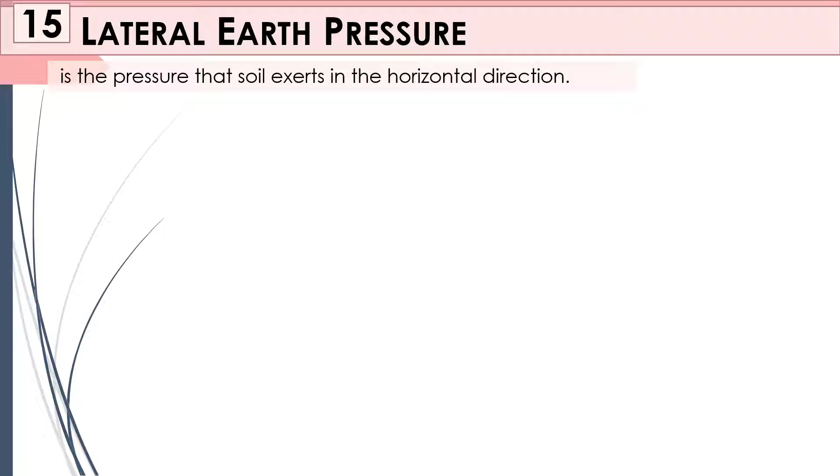So today's topic is all about lateral earth pressure. Let us define what a lateral earth pressure is. Lateral earth pressure is the pressure that the soil exerts in the horizontal direction. It is important because it affects the consolidation behavior and the strength of the soil, and because it is considered in the design of geotechnical engineering structures such as retaining walls, basements, tunnels, deep foundations, and braced excavations.

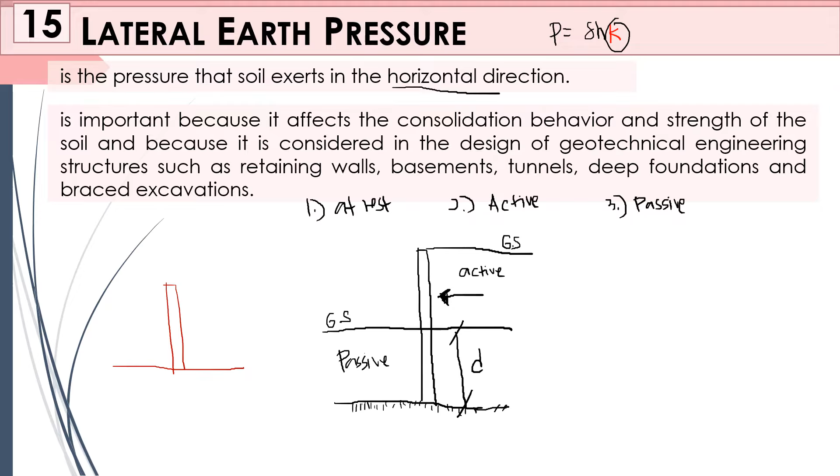It is when the lateral force of both sides are equal. So, sabihin natin, ito yung lateral force dito on the right side, ito naman yung lateral force natin on the left side. Meaning to say, the lateral forces are equal and it will lead to no wall movement. Kapag no wall movement, ibig sabihin, your lateral earth pressure is at rest.

Again, active lateral earth pressure tends the retaining wall to move away, or tinutulak mismo ng soil yung retaining wall natin, while your passive lateral earth pressure is yung retaining wall is papunta sa soil. Okay? Sana na-gets yung pinagkaiba ng tatlong categories natin.

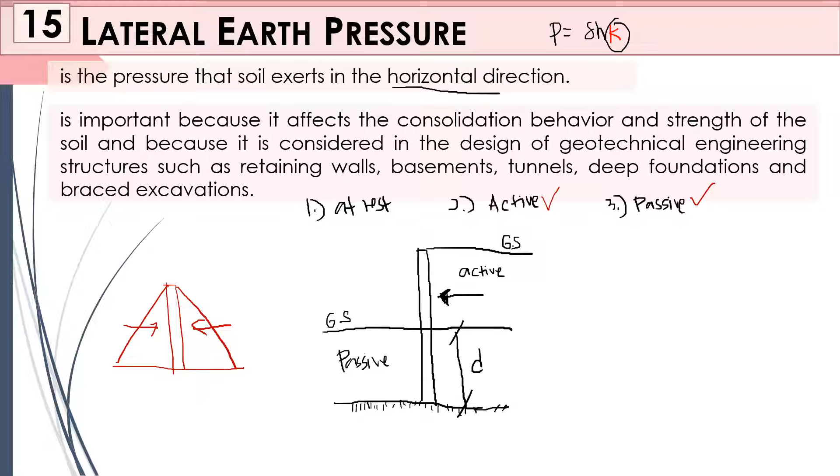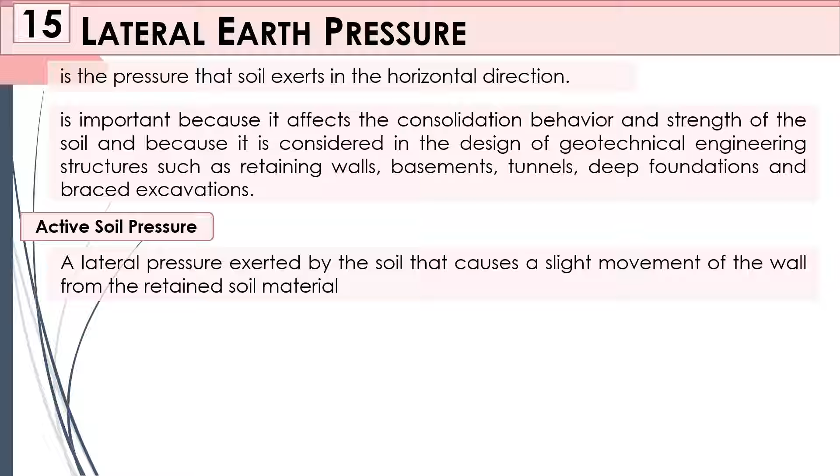Okay. So, active soil pressure, it is a lateral pressure exerted by the soil that causes a slight movement of the wall from the retained soil material. Pressure exerted by the soil against the wall is referred to as active pressure. So, yun yung sinasabi ko, pinupush away ng soil yung retaining wall natin.

While the passive soil pressure, it is a lateral pressure exerted by the soil by moving the wall slightly towards the retained soil material. Okay, ibig sabihin, it means that the retaining wall moves towards our soil. And passive soil pressure, that is the resistance offered by the soil to an object pushing against it.

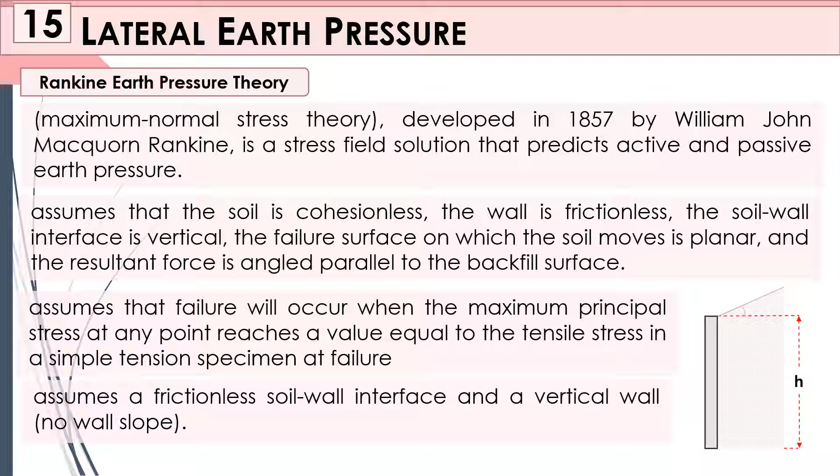Okay, so sa lateral earth pressure natin, we have 4 parameters to be considered. If meron tayong categories, meron din tayong parameters. So, the different parameters, let us introduce that to a pressure diagram from a 1 meter layer of the soil. So, for example, ito yung soil natin. So, the first parameter is yung soil natin.

And if we will try to draw a pressure diagram out of it, your soil will be a varying diagram. And the formula for your soil, same sa sinabi ko a while ago, that is your vertical pressure. So, para maging lateral siya, i-multiply lang natin siya ng coefficient ng ating lateral earth pressure. So, therefore, the formula is K gamma H.

So, ano pa yung other parameter natin? We have your cohesion. So, you have your active cohesion, which is PC, equivalent to 2C square root of K. And you have your passive cohesion. As you can see, the arrows magkakaiba yan. Pag sinabi nating active cohesion, take note that is a negative 2C square root of K. Pag passive cohesion naman, that would be positive 2C square root of K.

Ma'am, bakit po magkaiba? Bakit ang active is negative and ang passive natin is positive? So, balikan natin yung ating diagram kanina. If this is your depth, ito yung ground surface natin on the right side, ito yung ground surface natin on the left side. Sabi natin, active ito. Kapag active, ano ginagawa ng pressure natin? It tends to move away the retaining wall.

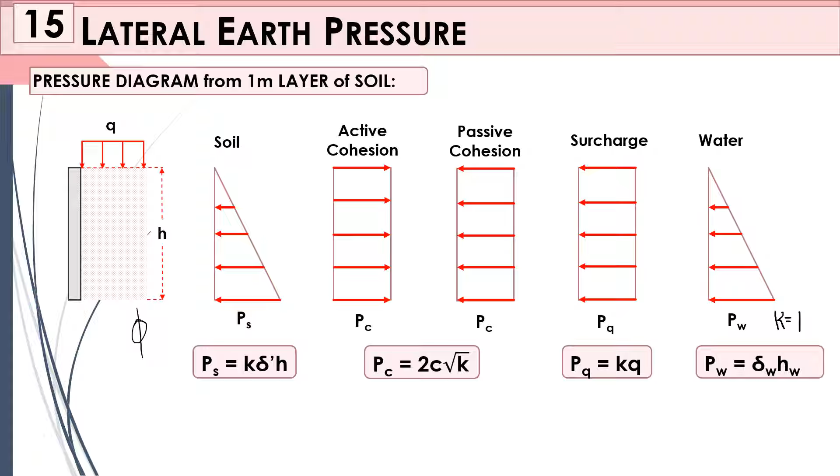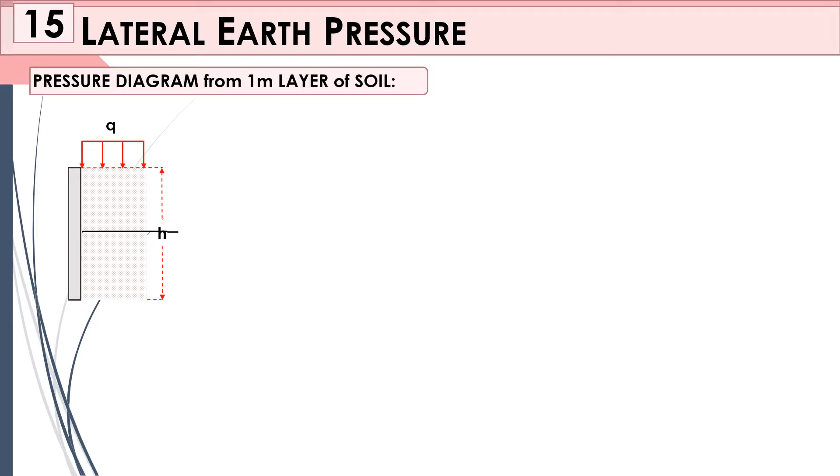Okay, so 4 parameters natin in lateral earth pressure: that is your soil, cohesion, surcharge, and water. Okay, so let us try to draw your pressure diagram based on the different parameters. So, sabihin natin, this is your soil. Let us consider that yung soil natin has 2 layers. Tapos sabihin natin, nandito yung water table natin.

So, first layer, this is your unit weight 1. This is your active coefficient 1. And this is your cohesion. On the layer 2 natin, this is gamma sat. Gamma sat na, kasi under na tayo ng water table. So, you have your active coefficient 2 and you have your cohesion 2.

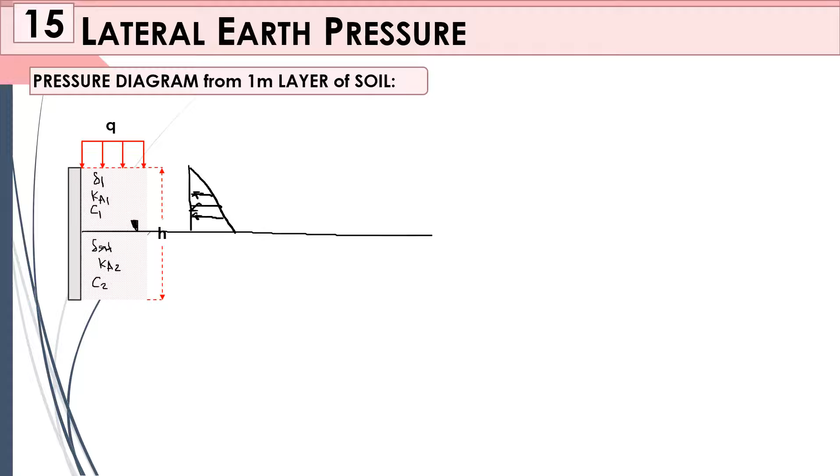So, unahin natin drawing yung soil natin. Sa first layer natin, di ba sabi natin that would be a varying distribution. Varying natin yung load natin. Since active siya, dapat ganito yung ating arrow. So, this is our pressure 1. Papunta sa layer 2 natin is magbabago.

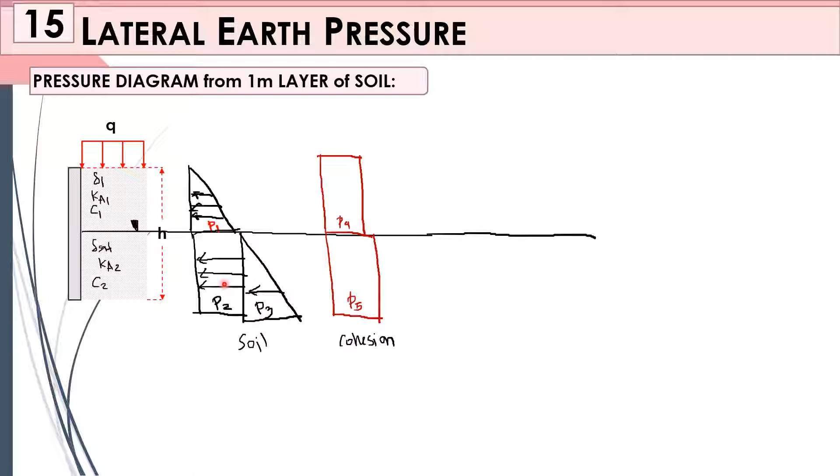Next is for the cohesion. So, since ang cohesion natin is rectangular pa rin, this is for the first layer. So, next is this one. Sabihin natin this is your pressure 4, this is your pressure 5. So, this is soil. This is for your cohesion. And so forth na for the surcharge and for the pore water pressure. Mas madali kasi kung iibahin na natin. Basta yun lang yung magiging idea, parehas dito sa sinabi ko sa ating soil, kaya meron kayong trapezoid na nakikita.

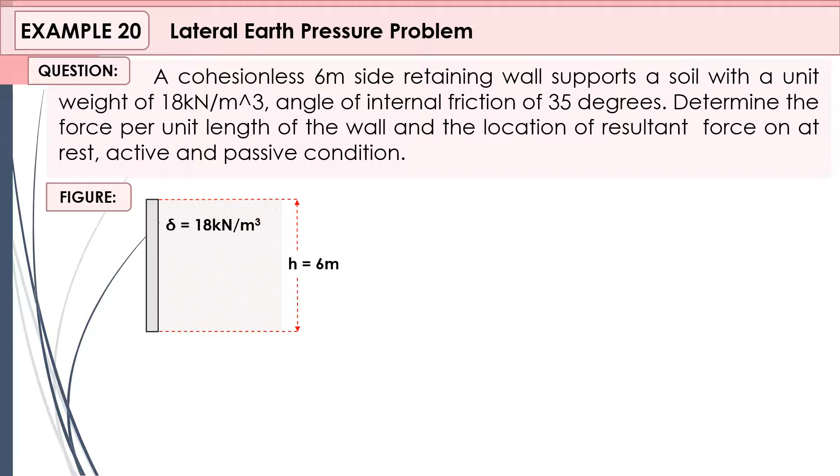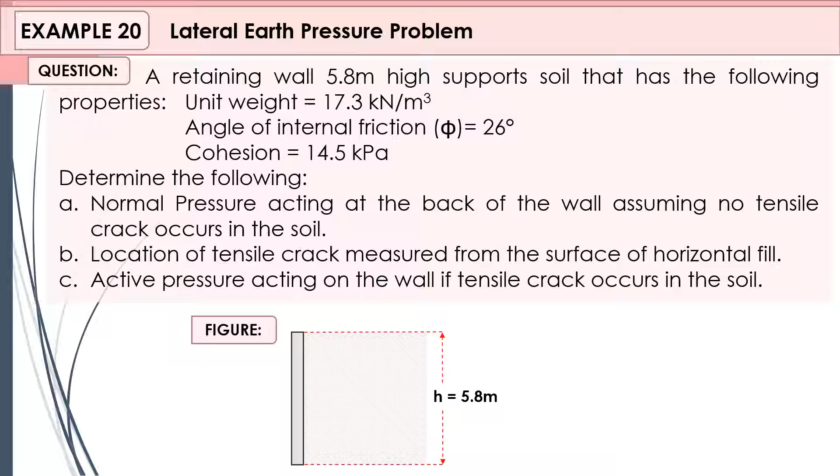So let us try to determine your normal pressure. So single layer pa rin yung example dito, no? So you have your cohesion, since sinabi naman. So let us try to get your soil pressure. So since active to, hindi nga pala sinabi kung active or passive.

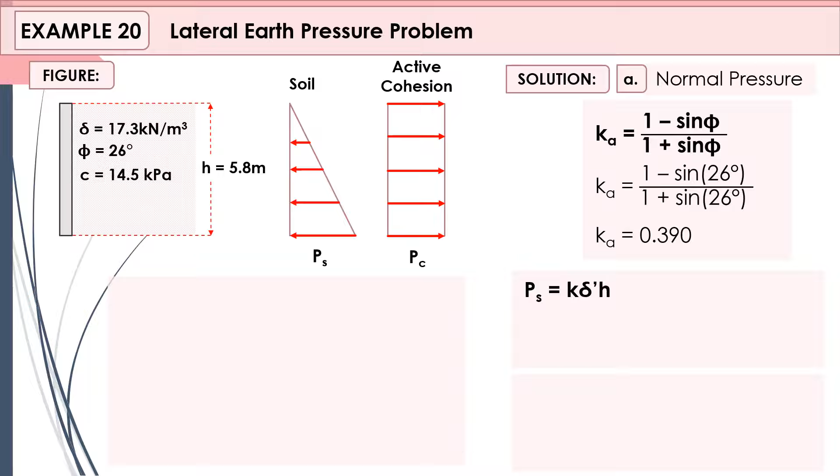So let us try to get your active cohesion. So that is 2C square root of K. Okay. So, kunin daw natin yung force natin dito sa wall. So, this is your Fs. This is your Fc. So, again, bakit negative yung Fc natin? Sabi ko sa inyo, kapag active yung soil natin, yung cohesion natin is negative.

So, to get the force na nagre-resist dito sa wall natin, get lang natin yung area ng ating pressure diagram. So, you have your 1/2 of PS times H times 1 meter, minus PC times H times 1, per meter length man tayo. So, that is 1/2 of 39.133 times 5.8 na height. So, that is for your soil pressure.

Minus your active cohesion or your cohesion pressure, that is 18.110, dito nang galing yon, times 5.8, which is height ng ating soil, times 1 meter. Therefore, the answer is equivalent to 8.448 kilonewton.

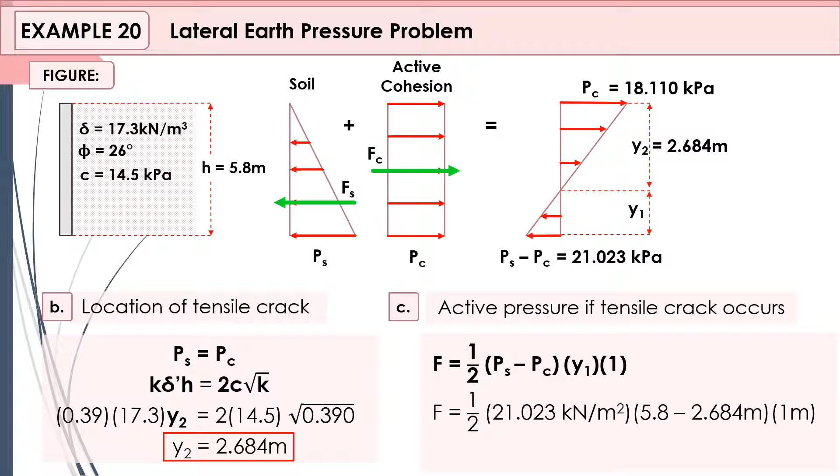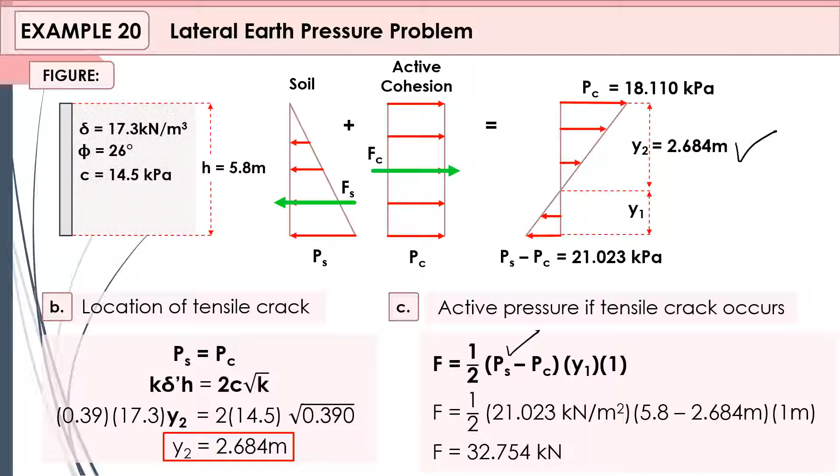Okay? So, that is just the difference between 5.8 minus 2.684. So, PS minus PC, nakuha natin to kanina, times 1, kasi per meter tayo. And that is equivalent to 32.754 kilonewton. So, ganun lang yung pag-analyze natin sa lateral earth pressure.

And for this problem, you will have your assignment. So your assignment is a vertical retaining wall 8 meters high is supporting a horizontal backfill having a moist unit weight of 17 kN per cubic meter and a saturated unit weight of 20 kN per cubic meter. Angle of internal friction above and below the water table are 30 degrees and 25 degrees respectively. So the groundwater table is located 3 meters below the ground surface. So you have your OCR, which is 2, below the water table.